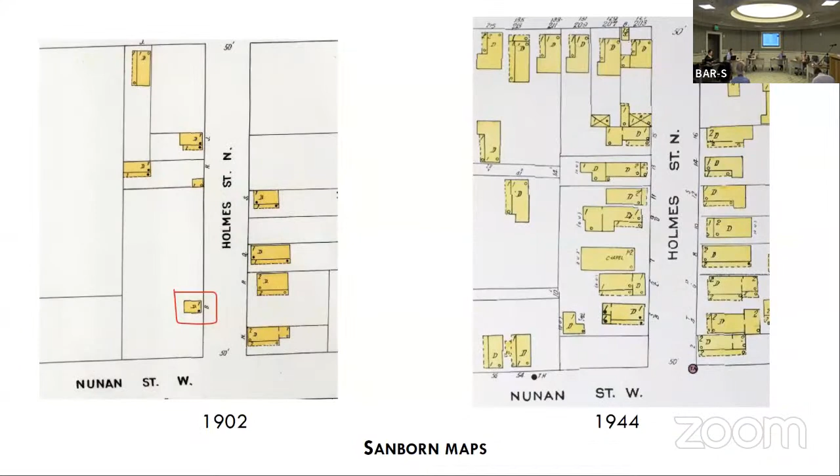This is the property's location on Nunan Street. There are some existing site photos next to New Home Street Baptist Church. Some context of Nunan Street. A Sanborn map showing the history of the building. I will turn it over to you, Laura. Thank you. I'm Laura Altman, LFA Architecture. I am representing New Home Street Baptist Church, with Gwen and Thad Miller as representatives from the church.

Yes, we are requesting demolition, but really disassembling and salvaging the materials that are there. And I want to be very clear that this is not demolition by neglect. The project was previously denied demolition on March 24th. But since that time, we have had a huge team working very hard to save this building, putting in countless hours and all kinds of efforts.

This includes the church itself, Friends of the Church, Historic Charleston Foundation, Preservation Society, city staff people, and structural engineer. We had Matters involved, and Habitat for Humanity also. Through that process, we completely documented the building prior to the roof collapse. So Matters did a 3D scan of the building before the roof collapsed.

We used that along with my field measurements to build a 3D Revit model. HCF and Preservation Society provided interns this summer to fully document the history of the building itself, the property, and the church history. We have applied for several grants, and were awarded one grant to help with planning for structural engineering and surveying. We put together some shoring plans that were then completely revised after the roof collapsed on July 22nd, just due to rain.

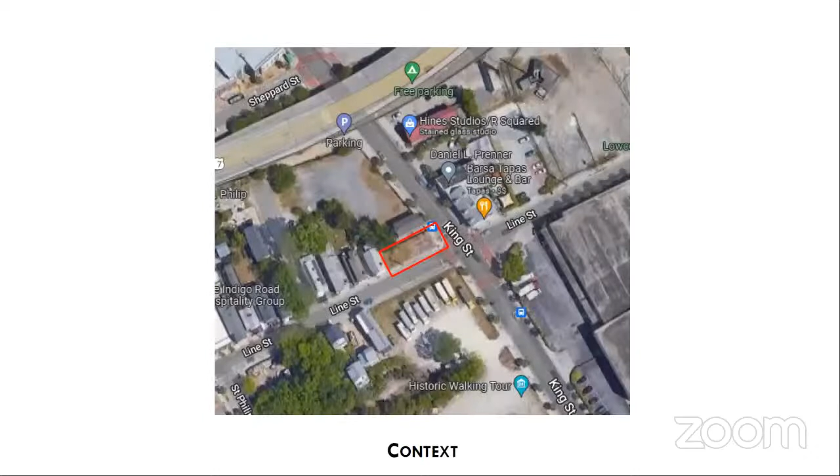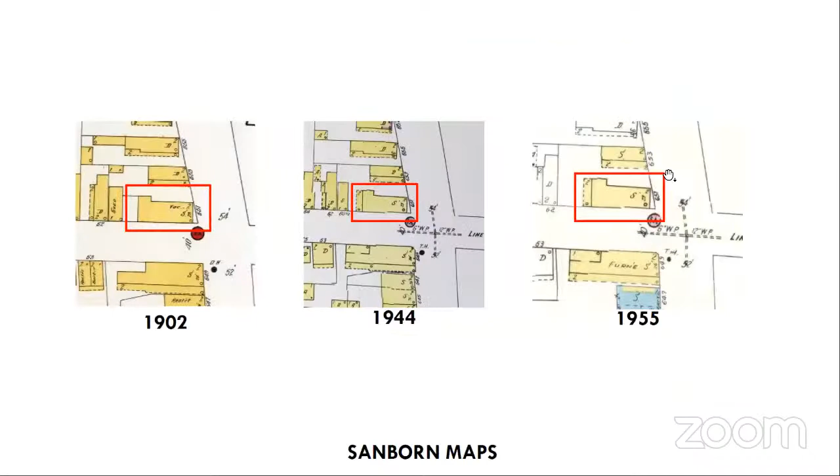All right, thank you, everybody. My name is Will Morrison with the Middleton Group, and I'm here joined this afternoon with Joel Rogers from our office and also Greg Smith from NK Partners from the ownership. We're excited to talk to you today about the developments that we've made on the design for the 651 King project since the last conceptual approval meeting back in July. Because some people may not have been here at the last meeting, I'm just going to do a really brief summary and then jump into the ways in which we've addressed some of the discussion items from the last project.

As Frankie showed, we're at the intersection of King and Line. It's kind of a unique site in that it's a really tight sliver on the corner there that used to be the home of a grocer with residents above, and was since lost to time. It's at a pocket of 2 to 3 story residences, and all around it on the south, north, and east sides are upcoming large developments, 4.5 and above story projects. We saw this as a great opportunity to provide a project that is a transition not only in scale but also in aesthetics and feel at home with the local residences, but also won't be so dwarfed by the new upcoming developments. Next slide, please.

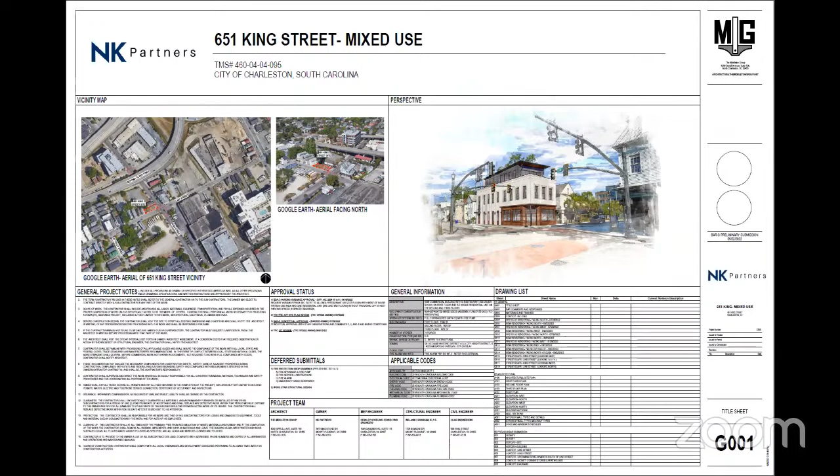A lot of the discussion at the last BAR meeting, in our minds, distilled into 3 major topics. One was about materiality and detailing, which will always further develop as we move into the preliminary stage. Second, how we articulated the 3rd story penthouse and its relationship to King Street and Line Street, trying to push that back and give deference to King Street and make it less prominent.

And then the 3rd thing was further developing the north elevation that abuts the neighboring property, and finding ways to give it detailing and the respect it deserves, even though it can't have fenestration because of its proximity to that property line, and coming up with ways to detail it that do not involve vegetation, which we talked at length about last meeting. Next slide, please.

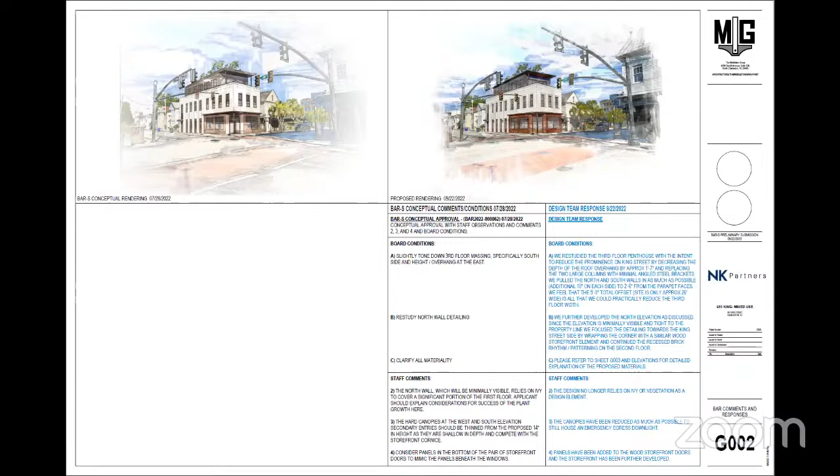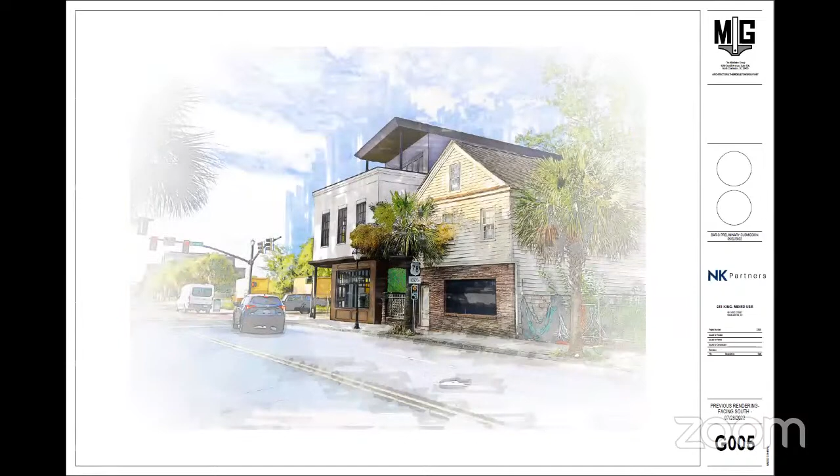So this is the rendering facing south on King Street from the last presentation. So next slide, please. So you can see that we further detailed, with some of the comments that came up last time, the storefront and kind of our vision of character of that. You can see that it turns up the north face of the building as well. Even though that side is minimally visible, it will be partially visible as you're kind of going along south on King Street. So we wanted to have that wrap the corner.

And then when we get into the elevations later, you'll see that we also have the rhythm of the windows of recesses kind of matching the windows on the south side. One of the primary things you can see here is that we pulled back the overhang extension and we took away those heftier columns that gave it more prominence on King Street and replaced them with smaller, more delicate brackets to once again try and pay deference to King Street and pull that back and give it more of the penthouse feel versus being too oppressive on the streetscape.

Next slide, please. So this is the facing west towards the King Street elevation. Next slide, please. So this is the new version. One thing we talked about at the last meeting was further articulating the surrounds around the windows that are above the storefront. And we also wanted to give a hierarchy to the windows and how they're treated. So on King Street, we were proposing to have a more substantial cast stone surround that's in similar character to that of the recesses, the brick recesses around the other windows that we'll talk about on Line Street in a moment, but also give that hierarchy of kind of the more prominent three windows on King Street and then moving down the Line Street elevation.

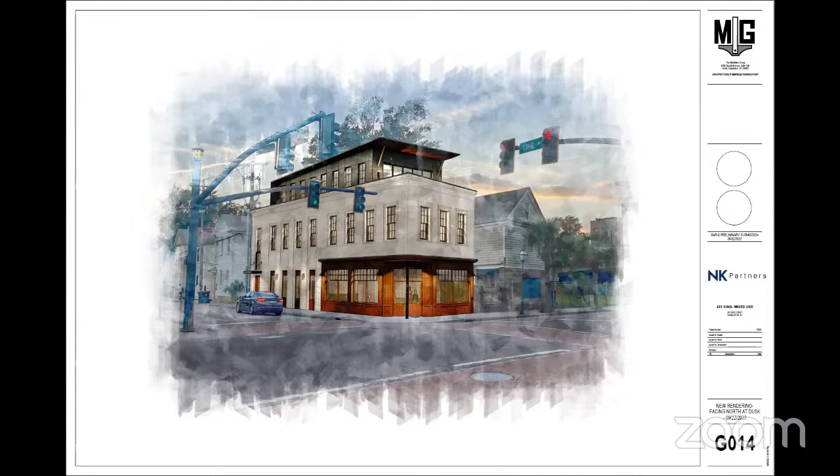Included a night rendering, more atmospheric than anything, just to give the understanding of our intent to really bring new life to this corner, and it will be a great counterpoint and anchor on the other side of Barca, and really bring more energy to this area.

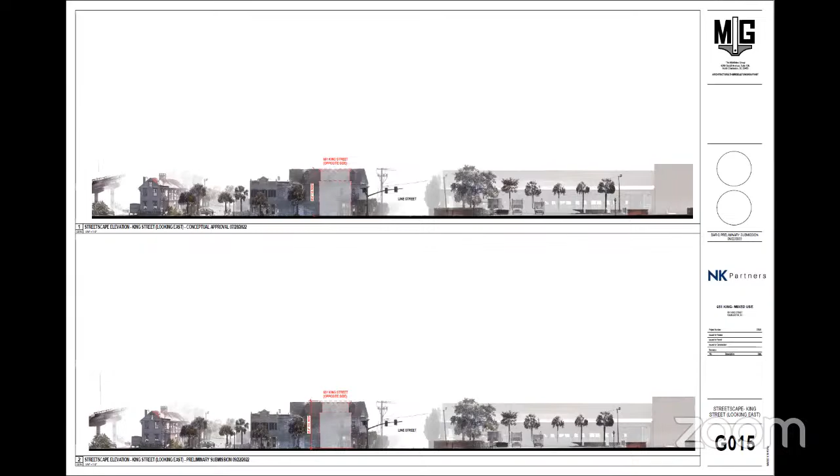Next slide, please. So at this point, I'm gonna ask if you can somehow get to slide 27, which is A204. Okay, I will be very brief. I just wanted to show the north elevation because it's something we talked about. Next two slides. Okay, so we've got the previous and the new.

So you can see, like I talked about before, we're continuing that storefront, kind of matching the south elevation, going about as far as we feel is really visible, and also honestly something that can be constructed, because we actually have a short masonry wall running along the property line that will make going beyond that difficult. And then also we employed the recesses with that same rhythm that you can find on the south elevation, in the same detailing.

I just want to thank you for your time. We obviously really embraced the comments last time. I think the discussion was a good discussion, and we hope that everyone feels that the project is really coming along. So, thank you.

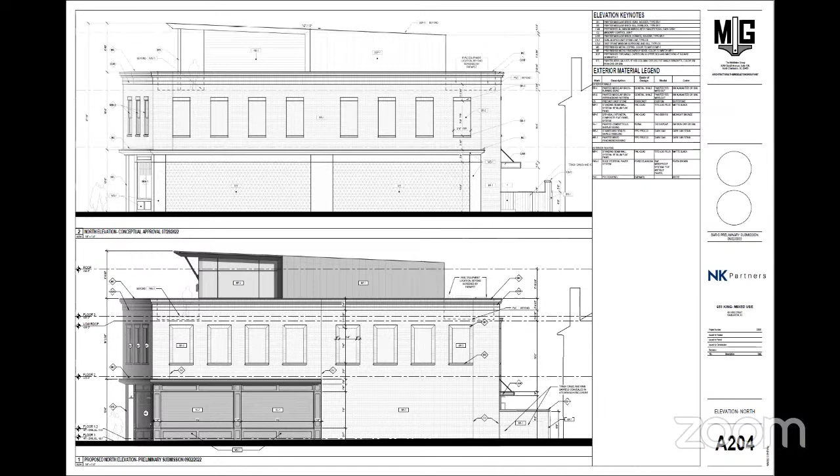Thank you. Does the board have any questions for the applicant? I would like to see that. Sure. And I do have a couple of questions. Okay. Sure. My question was about the beam at the corner. I'm going to go back and you see one of the renderings that shows the corner. Typically, historically, that beam is dropped, like in every example I can think of, all your examples, the beam over the corner column is dropped. I was just curious if it was intentional that you raised it there. You know what I'm saying?

Typically, this row of panels continues, and the column's a little shorter. You know what I'm saying? So the ceiling in that corner is a little lower. It's just typical, and I just wanted to get your perspective on whether that was intentional or whether you might want to look at that.

So, I think we liked how open that corner view was. I don't know how familiar everyone is with that corner, I'm sure very familiar, but it's also not the safest corner, let's say. Our thought was the more open we can keep that corner and keep that view triangle open, the better. That being said, we are not opposed to looking at lowering that, having that paneling continue. So that's something that we would be happy to restudy.

And second question, you're thinking to stain like sapele for all the wood, the windows and the storefront? Mm-hmm. Yeah, sure. I think that's all I got for now. Any other questions? Thank you. Public comment?

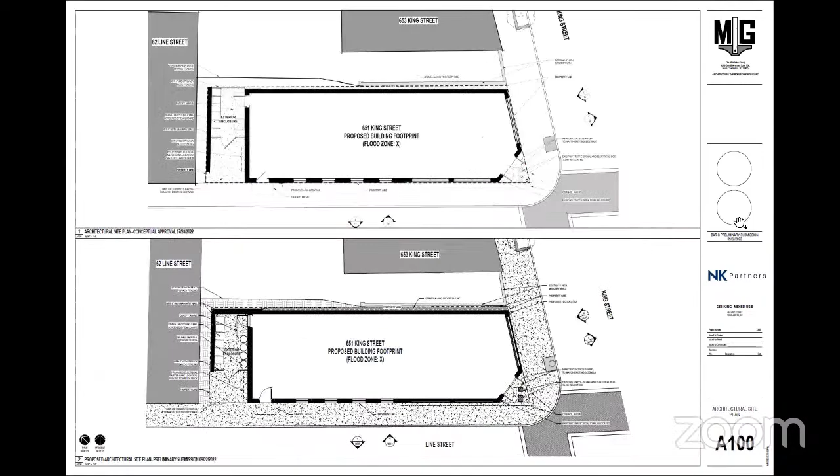Observations: staff noticed that the third floor mass had been visibly reduced. The applicant has responded to previous comments, and revisions also include a better window rhythm at the third level. Staff has no concern over the proposed materials, finishes, or colors, noting the palette to be neutral, timeless, and warm.

Comments: the cornice does extend over the property line, and it will require encroachment permits. We just wanted to be aware of that. I did speak to zoning, who's been working with engineering, so be aware, and they'll probably discuss it with you at TRC.

And while appreciative of the treatment, the continuation of storefront system around the north elevation should be either reduced or omitted, as it is atypical to be on an elevation which is not street facing or courtyard facing. Staff recommendation is for preliminary approval with board and staff comments.

Thank you. Would the applicant like to respond to any of the public comments? Yeah, sure. I'll be brief. We still stand behind the roof form on the third floor and feel that that ascension is a nice nod and transition to the larger developments upcoming down that way. In terms of the reduction, we try to reduce everything as much as possible, including the overhang, to the point where it's still a usable feature for the inhabitants of the third floor.

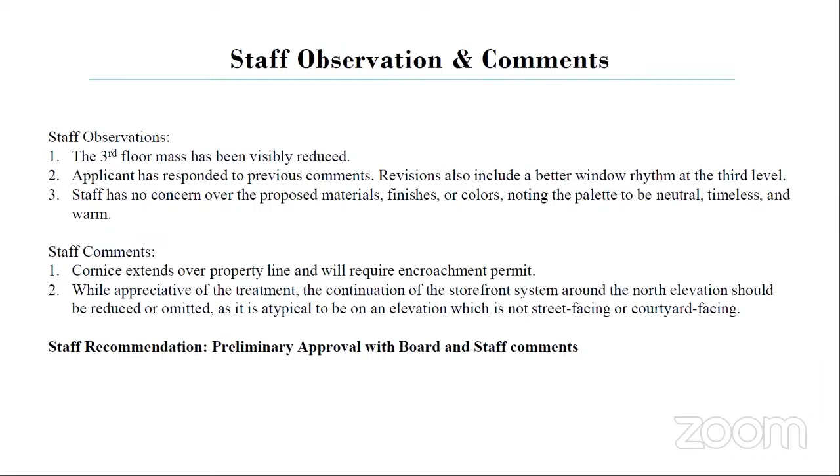Next item on the agenda is 91 Nassau Street. Sorry. I have your dinner platter. CD tray. Nassau is requesting conceptual approval for the new residence. Yes, I see, all right, it is nice. I'll wait till everyone settles down.

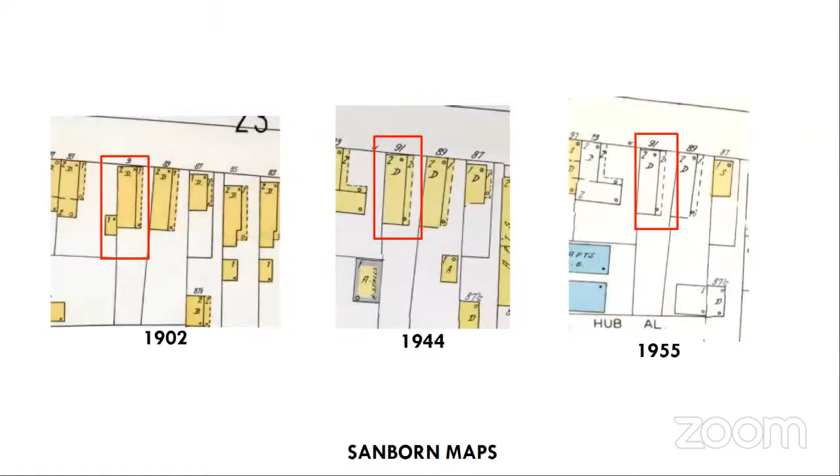The historic structure is a category 4 in East Side, circa 1852, in the Old City District. This is the location on Nassau Street. Some existing site photos. Context of Nassau. And some Sanborn maps showing the progression of the historic structure. I will turn it over to them. My name is Clark Ferguson. I'm the architect for 91 Nassau Street.

This project is for a new construction in the rear yard of the existing historic structure on Nassau Street. Since the last meeting, we've made several revisions. We've changed the vertical metal siding to a horizontal flat siding. We've reduced the number of windows by 8. Changed the casement windows to 6/6 double or single hung, we're not sure. And we've also changed the upper roof, brought it down nine inches.

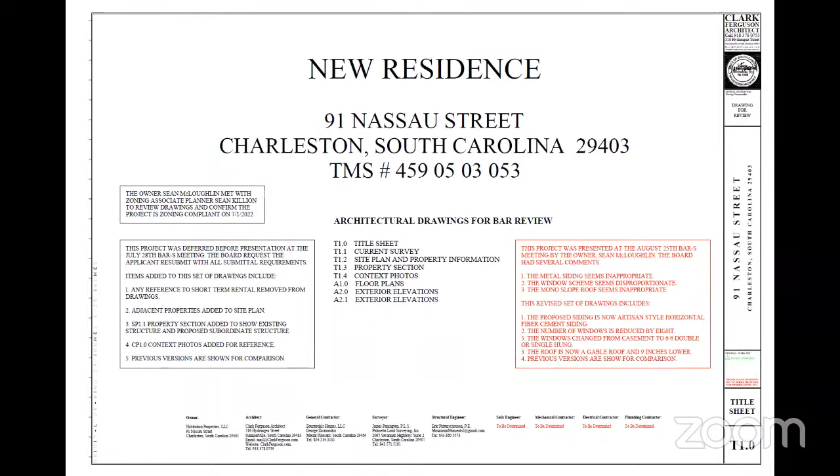If you can go to T1.3, you can see the existing structure on the right, our proposed structure on the left. The ones on the bottom were from the previous meeting. The ones on the top of the page are the current proposal. You can see how we changed the siding, the windows, roof. We go to A2.0.

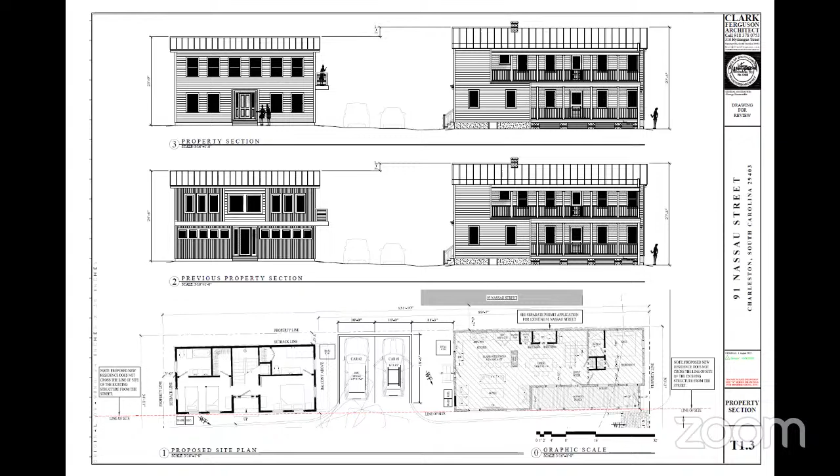Back one. Sorry, keys stick a little.

The two elevations on the left are the front of the existing house up front on Nassau Street, historic structure. The two elevations on the bottom are from the previous meetings, and the two elevations above, you can see the changes we've made. The siding, the windows, the roof. And on the 2.1, same thing, we have the previous elevations bottom of the page, and then above those are the elevations.

At the time when I turned this in, we waited 2 weeks until after the last meeting. And at that time, the BAR notes were not available. So it was only going on from what I talked to staff. On my cover sheet, I listed the 3 items that were mentioned to me: the metal siding, the windows, the slope of the roof. And after this was submitted, the BAR notes were made available. Just saying that ahead of time, I would have. I understood. We apologize. Apparently there was a miscommunication among staff as to whether or not it had been posted.

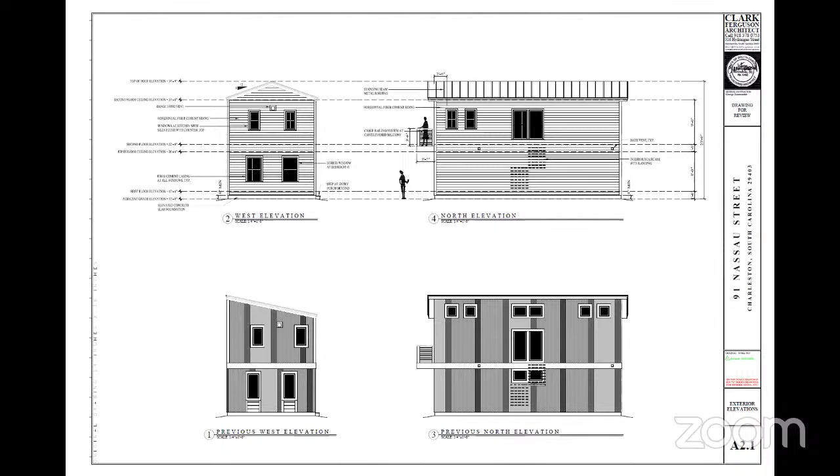I was just curious what you were intending, and then my other question has to do with the rake condition. Maybe this is just a drawing thing, or you're still working through it since this is conceptual. But on the side elevations, the north and the south, it looks like the gable and the rake extend pretty far past the north and south walls. But then when you look at the west and east, it's really tight. Yeah, it'd be great if we could pull it out, but go back to 2.0. See how we're touching; we're supposed to stay directly behind the front house and not go beyond it. I kept that in. And also noticed the comments about the whole structure to be thinner. The structure then would go deeper. Okay, I was just trying to understand if that was intentional. Thank you.

Thank you. Public comment? April Wood, Historic Charleston Foundation. HCF has reviewed the application. Although the design has improved, we still have some concerns about the architectural direction of this project. The first comment is that the roof pitch is too shallow. This should be increased to a traditional roof pitch. Second, the fenestration pattern is inconsistent and should be simplified. In some areas, the windows on the second floor are larger than those on the first floor. On the east elevation, the French doors on the second floor should be aligned with the first floor windows. We recommend that the balcony on the east elevation should be narrower and not extend the entire width of the east elevation. We recommend deferral so that architectural direction can be addressed.

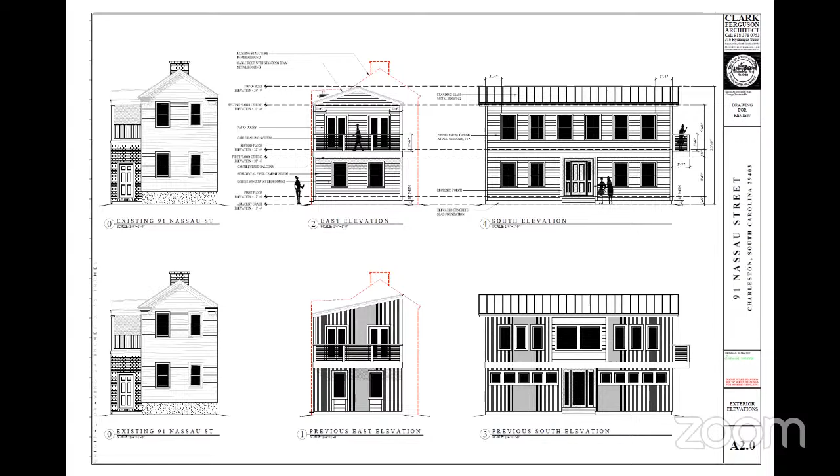Any other public comment? Hearing none, Frankie, if you will provide the city's recommendation. Staff observation: we appreciate the attention to detail in adapting the architecture to be more compatible with the historic structure. And we just have one comment, that the balcony would appear more balanced and visually supported with the addition of brackets. Our recommendation is conceptual approval with staff comments and then final review by staff. Would you like to clarify any public positions or respond?

No, I appreciate all the comments, and I'm willing to do most anything. I agree the fenestrations could be better. We can get more of a pitch on the roof by lowering the ceiling height on that first floor. I can bring it down, I can do that. And then lower, well, it'd be tricky if I'm trying to raise the pitch and lower the bill at the same time. I don't know how much I can take out.

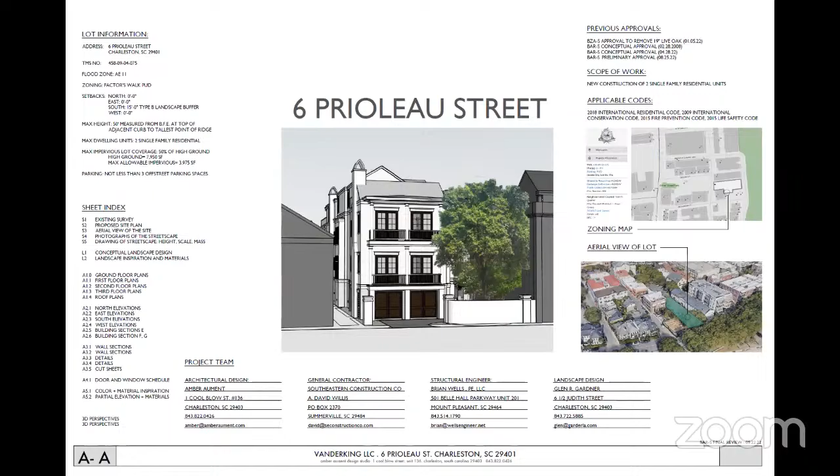Hello, I'm Amber Aument. I designed 6 Prioleau, and this project was in front of the board seeking preliminary approval on August 25th, upon which it received unanimous approval. Both board and staff were very complimentary in the ways in which we had addressed previous comments and implemented them into the design. As we moved to final, the one request was that we provide some physical samples for materiality. So I'd like to direct us to sheet A 5.1. So this is the material inspiration, and then Frankie, if you would move to the next slide.

All right, so here we have a finish schedule and a partial elevation of ways in which we're planning the building. The base of the building would be masonry construction, and then a limestone smooth stucco finish applied to that base. I've got 2 samples, and I'm anxious to hear board feedback. When I showed staff, one sample is almost a perfect color match to the brick that we would be proposing, and the other is just a slight gradient darker. The intention would be to sort of differentiate that base. So either it's fully monochromatic with a textural difference, or it's grounded with the slightest hint of a tonal shift. I'm open to both.

Can you see it in here? You can see it. Yes. Thank you. Okay. It's subtle, but you can pick it up. Okay, good. I have your other materials as well. All right, and so then as we move to the brick, it would be a painted brick. Both 8 Prioleau and 5 Mid-Atlantic Wharf, the neighbors to the north, are both warm whites. So we would stay in step with them.

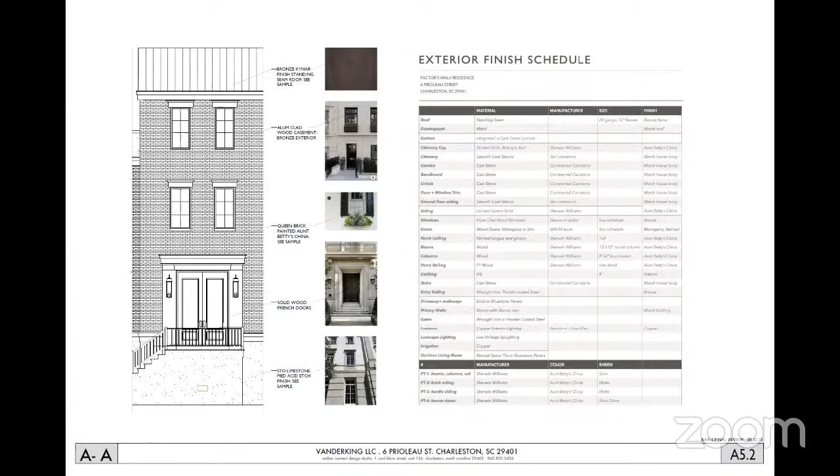Any public comment? And we'll move on to staff comments. Project received preliminary approval at the August 25th meeting with minor comment. It was noted that a mock-up would be beneficial. Mock-up panels are typically for workmanship review. The applicant has provided samples of all the major exterior materials for review, and staff has no concerns regarding these selections. Board should determine if any additional review of material or workmanship is needed.

Probably simply a drawing omission: add sills to the windows at the third floor, which are visible on sheet A3.4, and revise window H on the window schedule to include a 6-light grid as it does on the elevations. Staff recommendation is for final approval. Thank you, Frankie. And thank you, Amber. Sorry, I didn't say thank you when you finished. The board discussion?

We have clarification about the third floor sills, because they're consistent on the drawings throughout. Oh, you know what? I forgot that you could respond to staff's comments if you wanted. So there's inconsistency on the window schedule, you say? I believe so, but I could look into that. I'm not entirely sure what the error was, but it would be consistent with the elevations. Was that the window sills you were asking? Yeah, the third floor windows don't appear to have sills. They would have sills, so they would be uniform, matching the second floor.

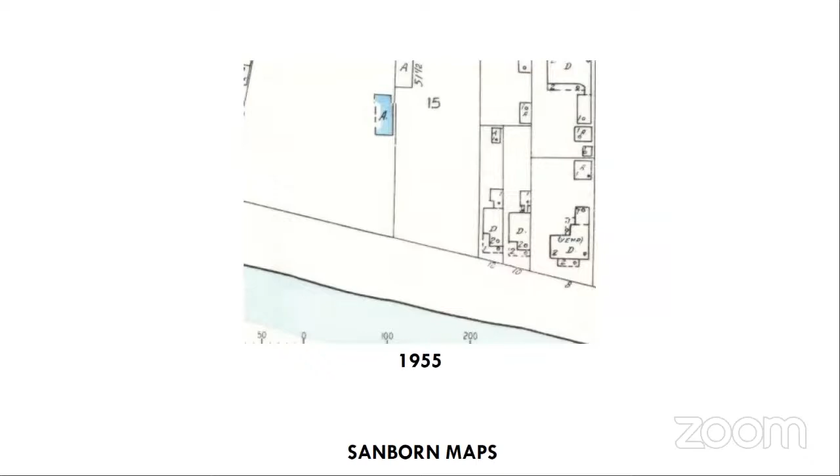Hey, I'm David Fisher from Thomas and Benson Architects. I would just out of curiosity like to know, I know Eddie has been involved with this project in the past. Is that the reason? I believe so. Okay, fair enough.

There's a little typo on the agenda. The building was actually completed in 1984. I think it says tonight 1997. That's the earliest date we confirmed. There was not one on the tax record, but we found something in the BAR records from 97, so that's where we got that. Okay, fair enough. So 84? 1984. Okay. This building is interesting. This home is interesting in its presence on Murray Boulevard.

Two people, well, one in this room and one in the back, are responsible for late 20th century architecture on Murray Boulevard. I believe you did the house in the corner of Murray and Glenwood. Is that it? No, you didn't do that? Anyway, Eddie did the addition to the building up the street that sits back off the road. But, anyway, this was done originally by Steve Thompson of the Charleston Architectural Group.

And if you've been around Charleston long enough, you've seen examples of this type of architecture, primarily out of the offices of LS3P. I can name Ronald McDonald House, CPW, the First Federal originally, now South State, and then it's been closed, the branch bank in the corner of Moultrie and Rutledge. But anyway, it's a very stylized type of architecture, and in scale on Murray Boulevard, it's quite diminutive relative to much of the adjacent homes.

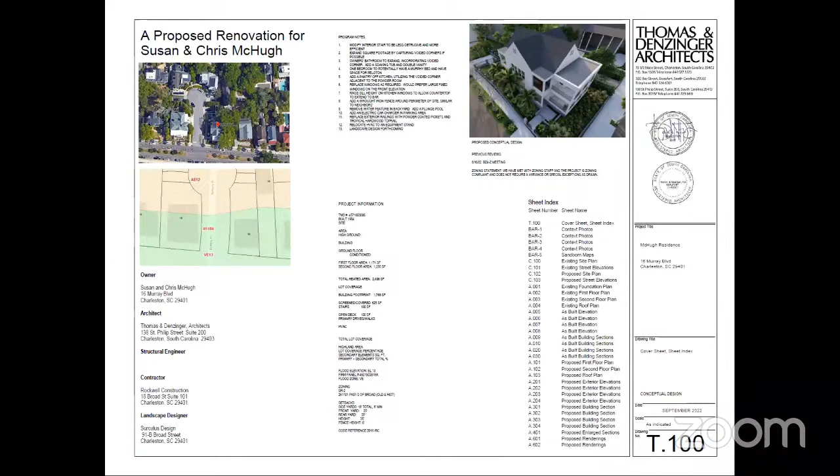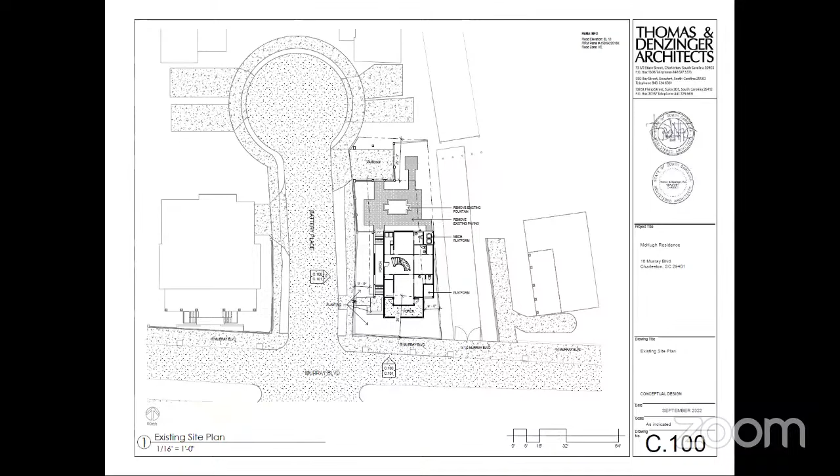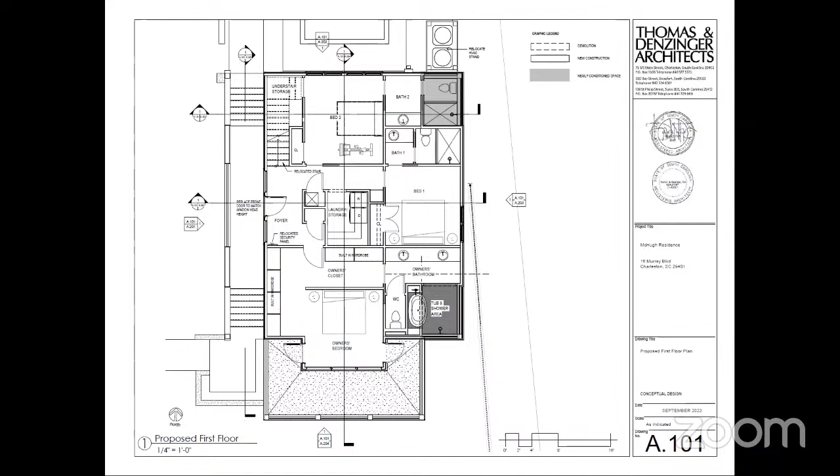So if you go to the proposed plans, you can see what we're talking about. Keep going. Thanks. Yeah, these are all the existing house that we documented. So, okay, here. This is the existing cutout. This is an existing cutout. And if you go up to the upper floor, next slide, please. This is the extension of the two-story cutout, corner, and this is a single-story cutout.

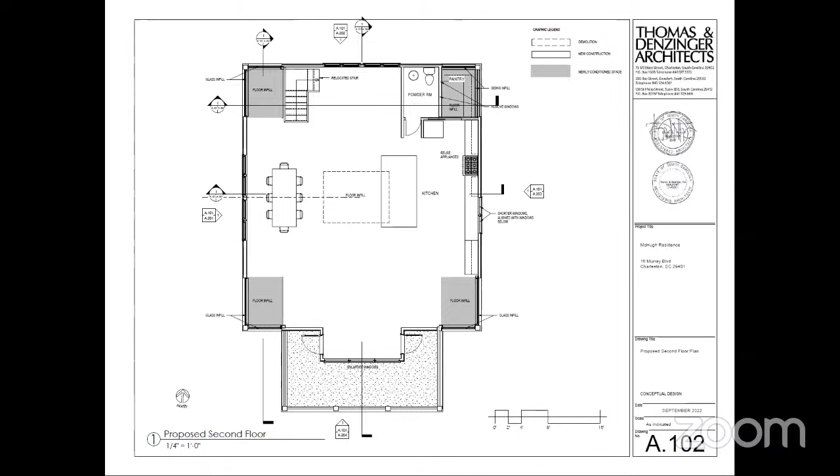So what we're proposing is that the exterior wall that is currently here, and basically here and here, be pushed out to fill in these corners. And in an effort to very delicately respect the existing look of the building, we're proposing that those corners be glazed. So the final result would be, Angie, do we have any renderings? Yeah, go to A601, A602.

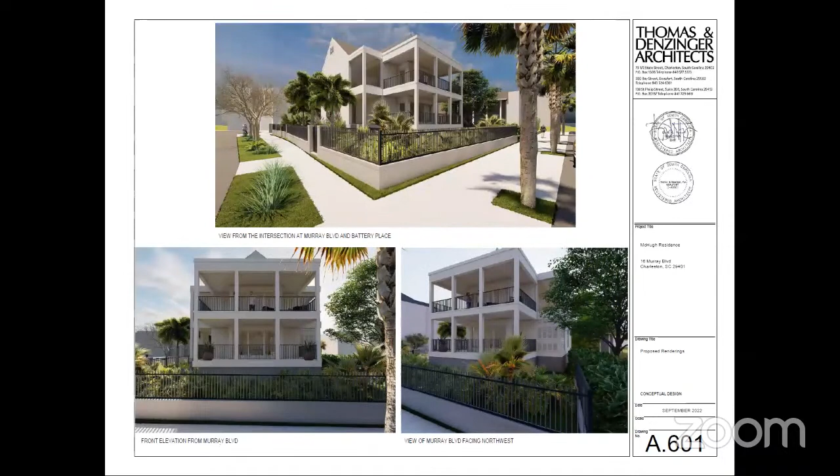So if you look at the house now, it essentially looks like this. Here's the cutout. This is the front door, the front porch facing Murray Boulevard and the Ashley River. And what we're proposing is to take this component of the house and infill these two panels with glazed frame. And those are the ones that are most visible from the street.

Angie, do we have one that shows Battery Place elevation? Yeah, so this is another example, and that is a single piece of glazing and a single piece of glazing. This is Battery Place and a single piece of glazing, and the other pieces that we're proposing to fill in, we're borrowing from a particular vernacular down at 8 South Battery. I think we've got a picture of that in our presentation. One of the elevation pages. Yeah. Maybe A201.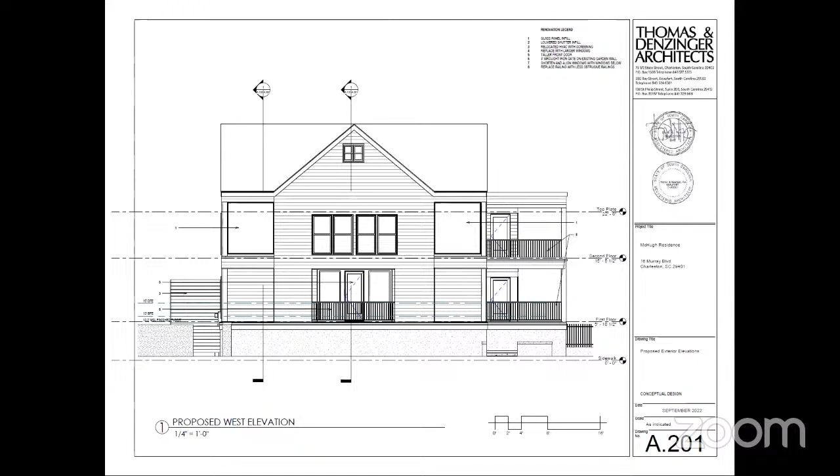Other public comment? Hearing none. Would the applicant like to? Oh, I'm sorry, Frankie. City recommendation. The BAR has a review principle where it states that thin mullions or muntins may be required on windows larger than 2 feet in any direction and shall not be located between or behind the outer glass surface. The depth of the mullion shall not be less than the width. So per our review principle, we recommend restudy of the proposed windows.

Large sheets of glass are typically inappropriate for this area, and windows should mimic the existing double-hung windows on the house, which are being removed. We also recommend restudying the shutters. The current layout of the shutters gives an appearance of sort of horizontal bands.

But we just recommend restudying the pattern. Staff recommendation is for conceptual approval with staff comments. Thank you. Now, would you like to respond to anything? No, they're all fair points. I do appreciate the recommendations.

Yeah, it's not a historic building, but it does have character, and we are extremely aware of the character that this building represents. It's mid-80s architecture, which is not abundant in the city of Charleston. And it also shows a clear intent on the original designer's part to have that representation of the house to porch relationship, which Charleston is so famous for. That is specifically why we chose to not tinker around with the infill and just head straight at it, as if we didn't want to try to be too clever or too cute about it.

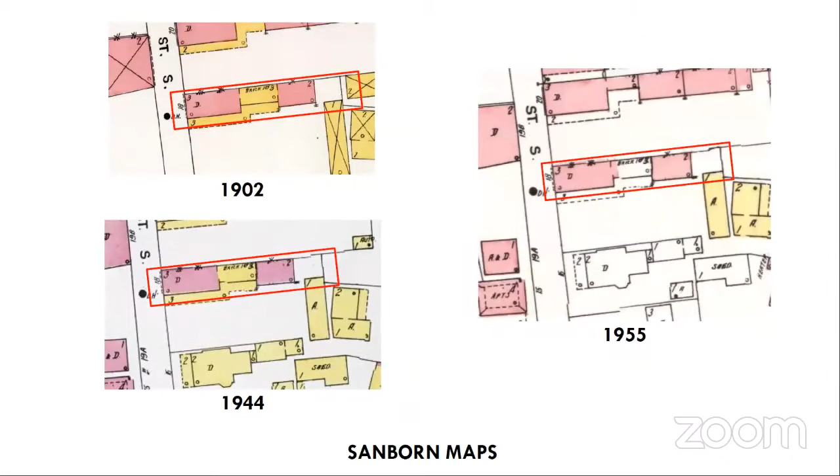And so I'll note that Eddie Fava is recused from this application. That is standing room only in the crowd. So Frankie will introduce. Church Street is requesting conceptual approval for the renovation of a non-historic carriage house. The historic structure is a category 2, circa 1840, in the Old and Historic District. This is the location on Church Street. Existing site photos. Church Street. And Sanborn map showing the history of the structure. And I will turn it over to the applicant.

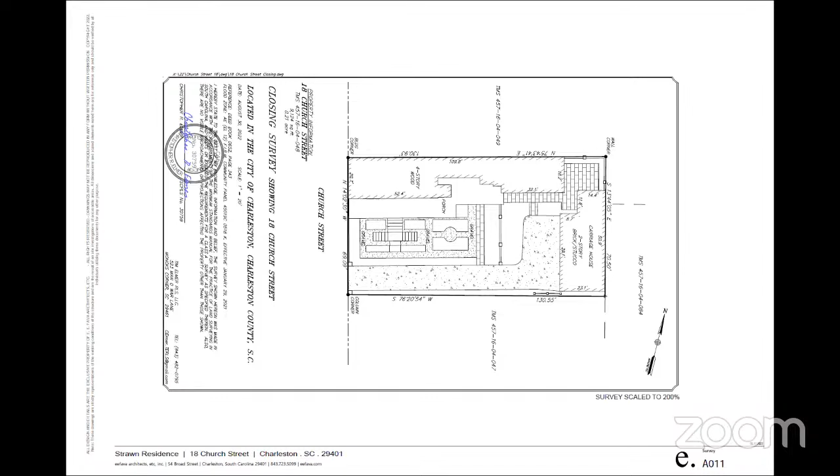All right, Michael Strobel with eefaea architects, and we are representing Stephen and Andrea Strawn, the owners of 18 Church Street. Next slide, please, Tracy. So it's worth noting, we are only requesting modifications to the rear carriage house, as shown in the survey there. Next slide, please. So these are the previous Sanborn maps. There is a single-story structure shown on the Sanborn maps. It's not the same footprint as what we have here, and obviously what we have now is a two-story structure. So we don't have any indication that there's any historic material on the property. And I believe the city noted that it was majorly modified around 1999. Next slide, please.

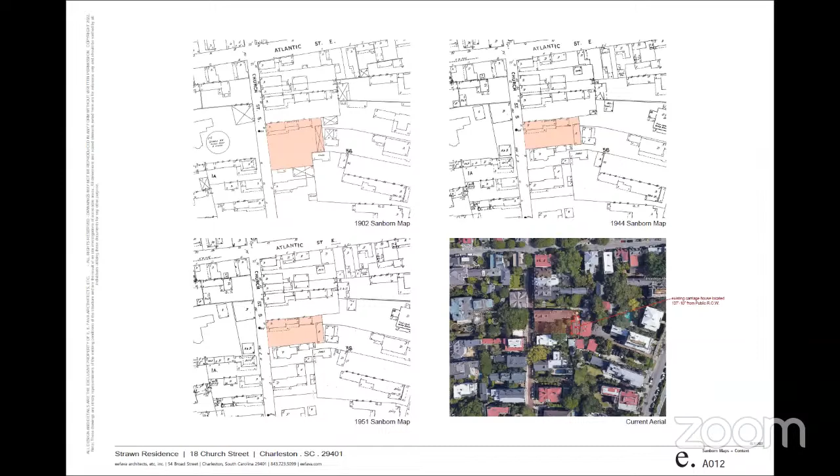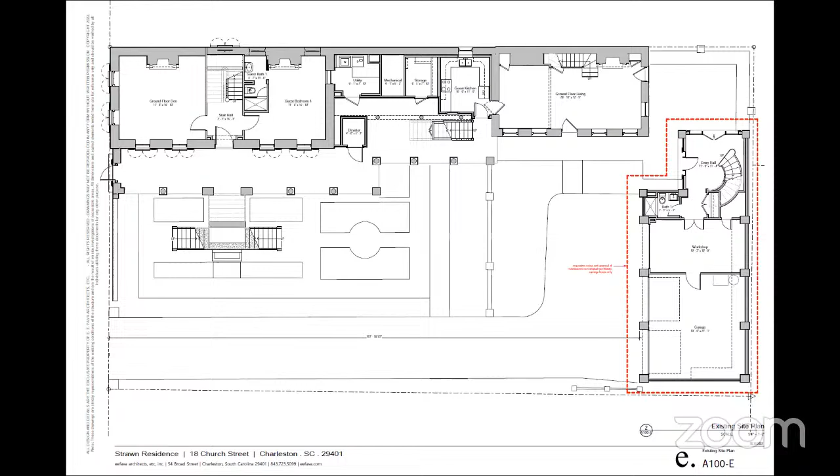So again, the building sits between 107 and 108 feet off the public right of way, so it sits pretty far back on the site. It's kind of nestled behind the main house on the site. You can go to the next slide. So you'll see we did block in some landscape stuff that's going to come later with a later design. The only thing that we're requesting is modifications to this carriage house. The footprint stays the exact same.

The main thing that we're proposing to do is remove the stucco on frame, which we know is an issue in town, and infill those areas with a brick veneer so that we can work with some of the existing framing structure that's there. And the only thing that we would be keeping really as far as exterior cladding are those existing brick piers. You can go to the next slide, please.

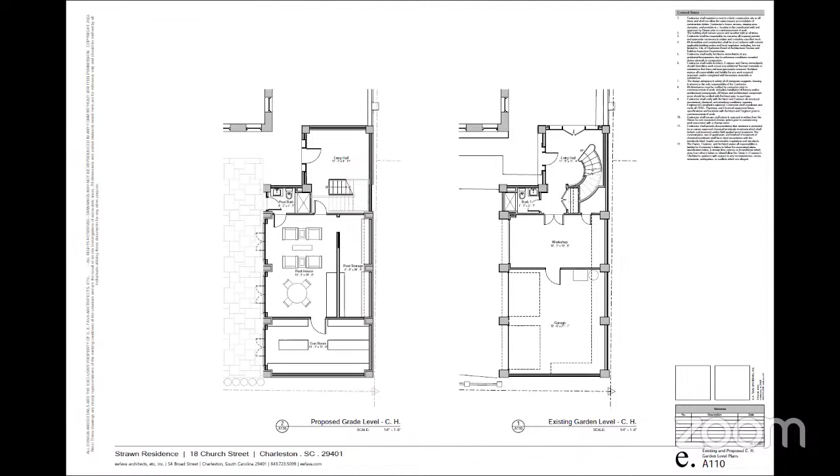That's it. We did reach out to the Historic Charleston Foundation and Preservation Society. They voiced no concerns. And we also gave letters to all the adjacent neighbors earlier in the week and haven't heard any concerns from them as well. Any questions?

From the drawings, it looks as though there's minimal roof overhang. And you're going to add a brick veneer to the framing? Yes. So you're going to adjust the overhangs, or is there enough existing overhang to accommodate the veneer? Because my instinct is the brick veneer is going to extend substantially further than the stucco on frame.

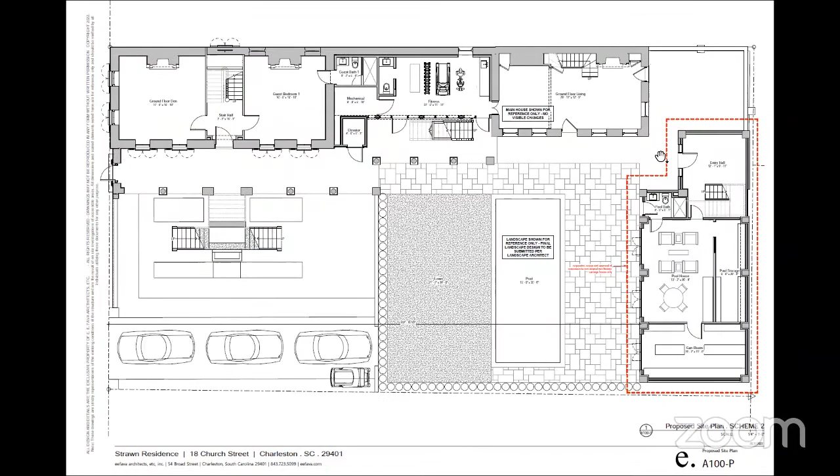Would you like to make public comment? Okay. And we have no public comment submitted, so Frankie, if you would provide your recommendation. On observation, we found that the current alterations to the carriage house were completed congruently. We thought the new front door was very tall and sort of awkwardly proportioned. We just recommended reducing the height to match the other door, maybe adding a transom window or some sort of detailing like that to emphasize the entry. But we are recommending conceptual approval with staff comment and a final review by staff.

I will note I'm somewhat sad to see what I'm calling the flattened onion dome go away. What is up with that?

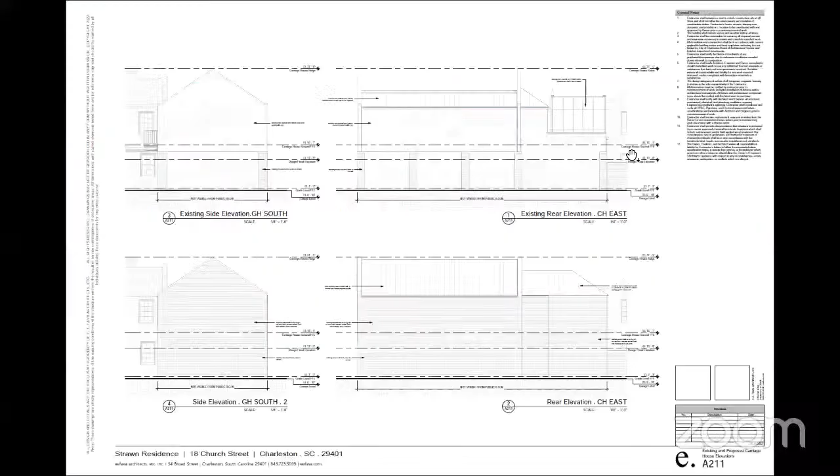Any reply to that, or are you good? Only thing I would say, if you go back to, I think it's sheet 2. We're happy to restudy that entry if needed. It is a double height space, which is why it's taller than a shorter door. I'm not sure that it would be very visible from public right-of-way. Again, have to restudy. Thank you.

All right, so we can move on to board discussion. I wrote down, looks good to me, current conditions are bizarre. Flattened onion dome. My only thought was that the doors, the arch doors, almost felt a little too short. It's like we have shortest at the biggest area, and then they got a little bit taller in the bathroom, and then a lot taller. I don't know, something just didn't feel quite right there, but maybe constrained by ceiling heights and all.

And maybe it's, I can't quite put my finger on it, but something didn't feel quite right. There's a lot of space between that and the windowsill above. Yeah, but then like you said, the stuff on the left isn't going to be that visible from the public right-of-way.

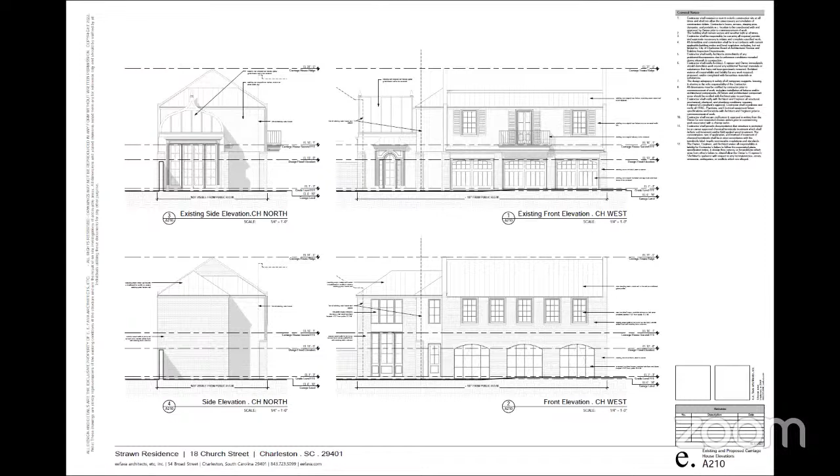Get the other pile. I had a whole pile. I guess you got them. We'll find them.

24 Humphrey Court is requesting final approval for new construction of single-family affordable housing. This previously received final approval June 11th, 2020, which has expired. It was not surveyed in Cannonborough-Elliotborough. Will be new in the Old City District. I do not have my next slide, I apologize. Crazy.

Good evening, board members. Here with Julia Martin Architects. Final approval for this new single-family residence that will be an affordable house. It's being constructed by the Episcopal Diocese Community Housing Development Authority. As Frankie mentioned, it received approval in June of 2020, but due to the pandemic's effect on material prices, the house has not yet been constructed. And unfortunately, that approval lapsed 3 months ago. So rather than being granted an extension, we're obliged to ask you to approve it.

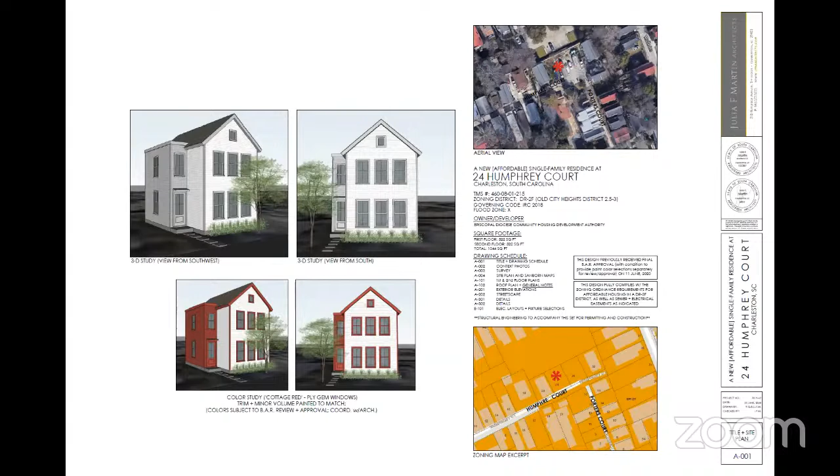Since we have two people that didn't get the benefit of my wonderful speech the last time, I'm going to very quickly give you the basics. I'm going to go to the next slide. That is the context. Next slide. Porter's Court, Humphrey Court. I think everybody's pretty much familiar with it. This is survey of our lot, which we're dealing with two fairly restricted utility company easements at the front and the rear, so that's impacting the siting and overall plans somewhat. We're in an X zone here, so height is not a concern. Next slide.

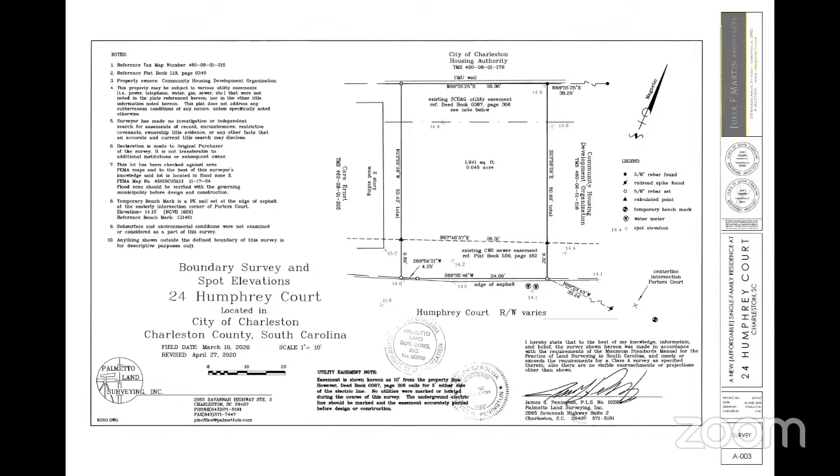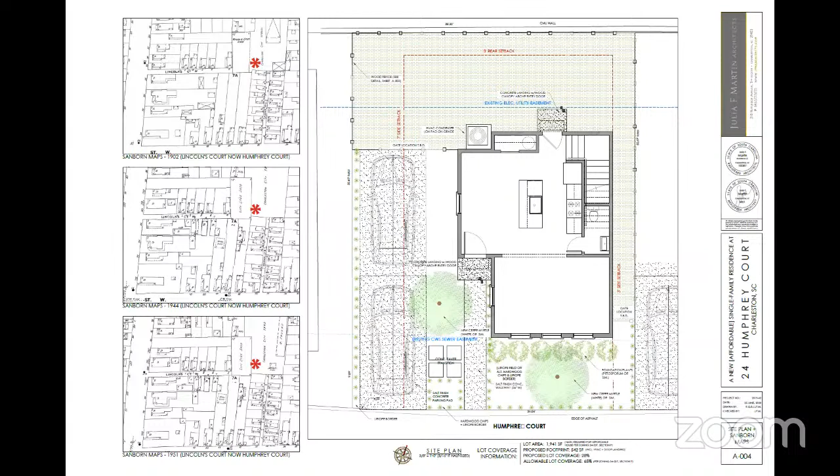All right. This is going to be slightly out of order. That's probably on us. All right, so site plan. Let me jump ahead. So again, relatively simple layout, but we're setting back from the street in a slightly unique way. We are able to achieve parking on this lot, ample green space, given all the parameters of the lot.

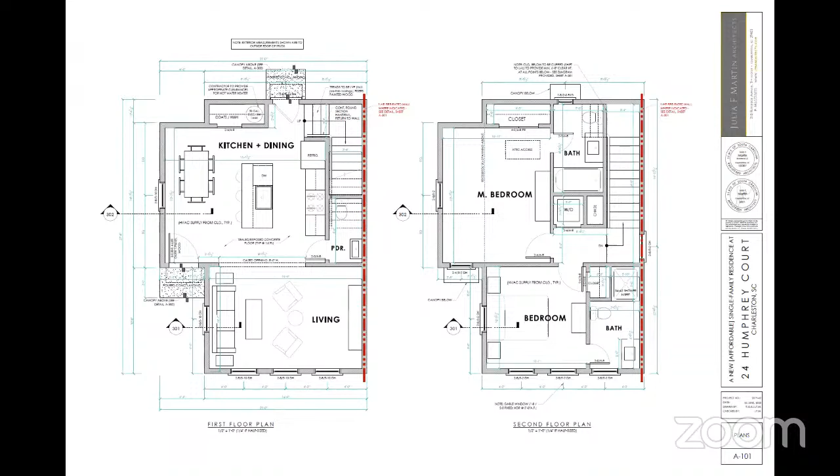All right, so this is the first and second floor plans, fairly modest 2-bedroom house, pretty simple, interesting massing on the exteriors and what we're going for here. Gable roof with architectural shingles, and there's kind of a minor volume there on your left that's low slope membrane.

Next slide. The exterior here, we have a 2-story, 3-bay main volume with a secondary minor volume on the right and west side, excuse me. It's not too dissimilar from a traditional single house form, but by pulling the entry a little further back, we're able to break down the mass and also really read as something a little bit more contemporary.

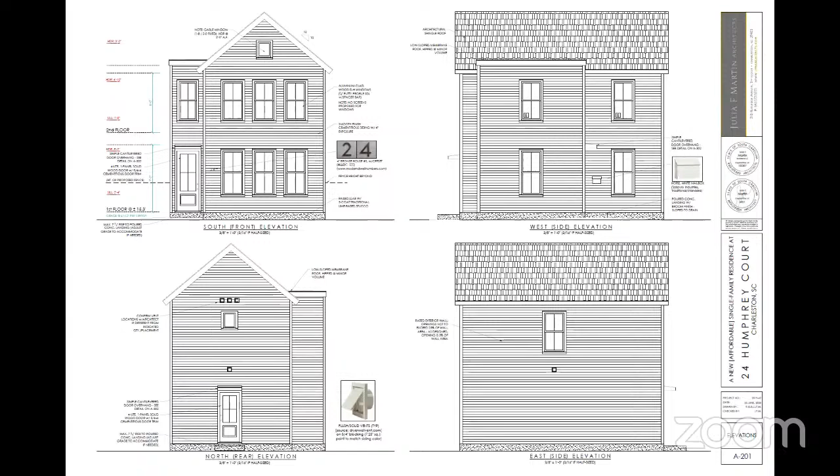Materials are a 4-inch exposure cementitious lap siding, 2/2 aluminum clad, SDL windows, the standard grills on the exterior, spacer bar in between. We have a relatively minimal foundation with traditional brick-coat smooth stucco finish. And in terms of colors, which you don't see here, but I think probably was on our title sheet there, we're kind of imagining a light base color on a siding with the main volume and then a single strong trim color that would occur at the trim, the fascia, the window sashes, and then the minor volume siding. I just have a nice contrast throughout.

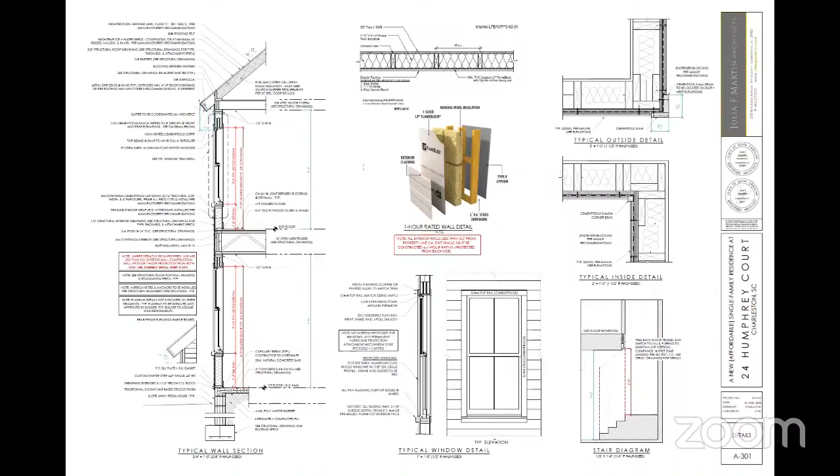Since this project was previously approved by the board, and its approval has merely expired without extension, we have no additional comments. Are recommending final approval with color to be reviewed with staff. Thank you. Erin, do you have any feedback on that? Thank you. So we will move into board discussion. I think it's a handsome little structure. First time I've seen it with all constraints, so well done. I still like it.

Just make a motion for final approval with the staff comment. Yeah, color to be reviewed by staff. Is there a second? Second. Oh, sorry. Eddie, you made the motion? Yes. All right. Fillmore seconded. All in favor? Aye. Chair votes with the other three, and 4-0 in favor. The motion passes. Don't let it expire again.

Our final item, which I'm sorry, it was not on my Dropbox thing. Oh, sorry. I had left it off the agenda and I was corrected. Is 43 Hasell Street. And Frankie will first introduce the project and then we'll hear from the applicant. 43 Hasell is requesting conceptual approval for solar panels. It is a category 3 in Ansonborough, circa 1840 in the old historic district. I don't know why we don't have context slides. I'm so sorry, Erin. That's all right. All right. Erin here with Julia Martin Architects.

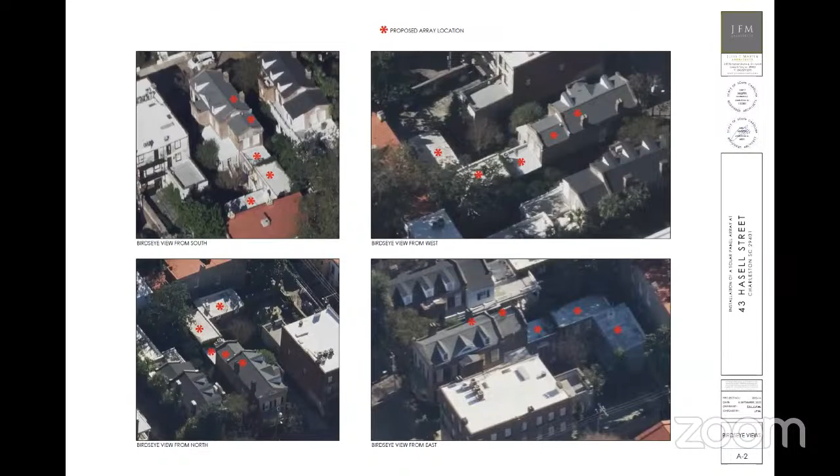Next slide, please. Here is the proposed roof plan showing the panel layout, as well as a few specifics on the system performance, which essentially boils down to this installation having the ability to generate 92% of the energy to this property, with little to no visibility from the street and no impact on historic fabric. Next

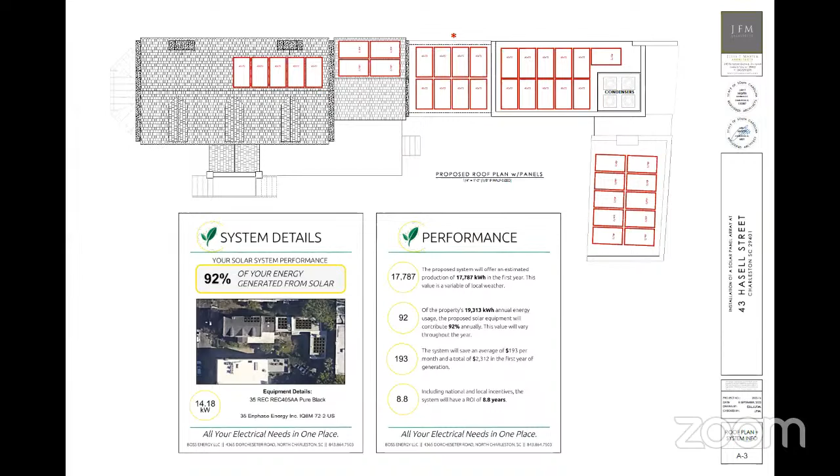slide. This slide just has a few more details about this specified panel. It's really a low profile. It will only project a total of 4 inches above the roof. And I've got James Reed with Boss Energy here with me, as well, if you have any technical questions about the system. That's all I have. If you have any questions, please.

So the panels on the low slope roofs, the flat roofs of the additions, they will have the same projection, just 4 inches. That's a maximum too. It's probably 3.5, but 4 is the maximum. So they're flat. There's no slope on those.

Any other questions? Erin, you mentioned that the shingle roof was in need of replacement. Are they going to be doing that before they do this? Yeah, that's already part of it. Oh, part of what was already done. Okay, I missed it. Thank you. Yeah, Eddie, we saw this about a month ago. Okay, all right. Sorry about that. Any other questions? Thanks. And I presume there is no public comment.

And we will ask Frankie for her position. Staff would just encourage solar panels not to be installed on the roof of the original structure, but that being said, we don't think they would be visible if they are put there. So we're recommending final approval.